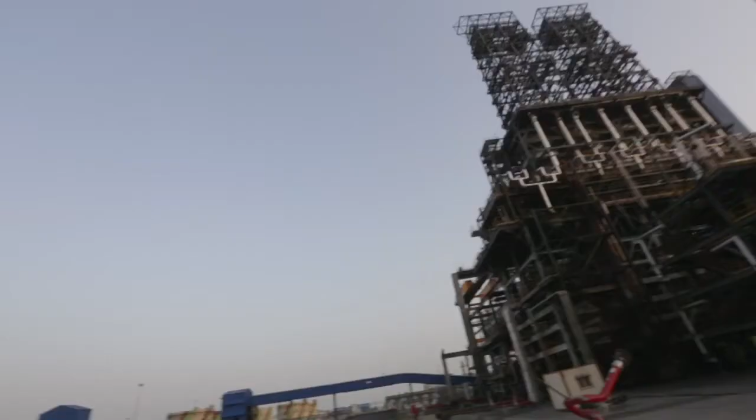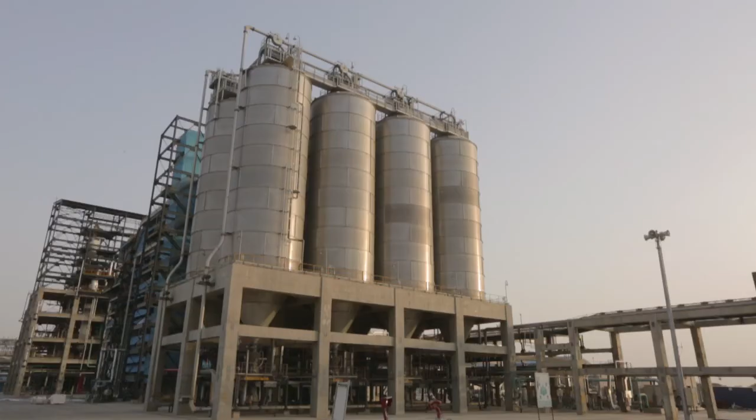Responding to this challenge, the Guru Gobind Singh Refinery was set up in a record time of 4 years, making it the fastest oil refinery to be built in India. Today, what stands in the middle of the agrarian heartland of Punjab is an industrial superstructure powering lives across the country.

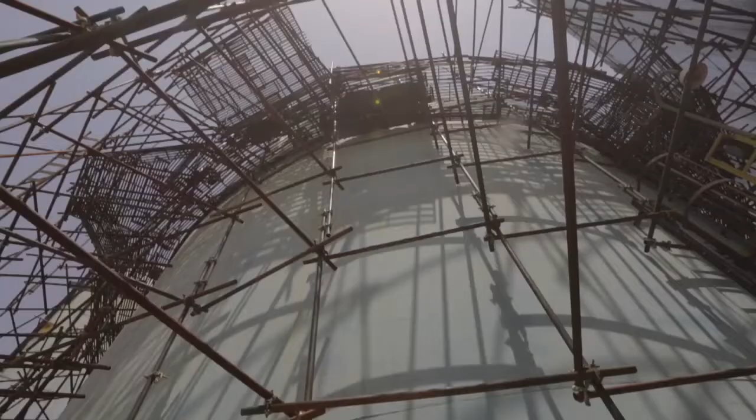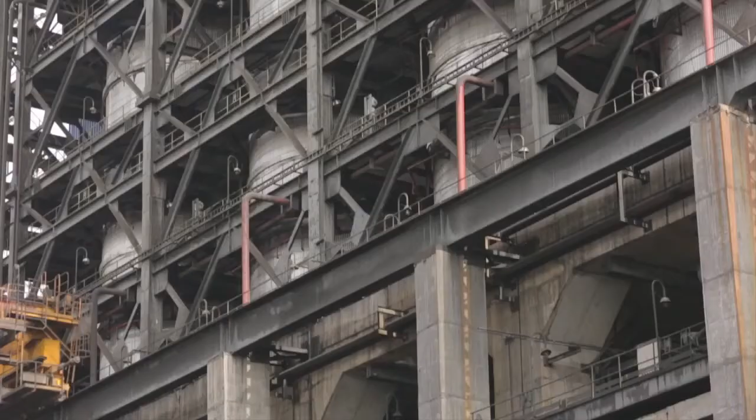Close to 50 degrees Celsius, almost 9 degrees lower than the highest temperature ever recorded on the planet, Bhatinda is reeling under a severe heat wave. This small town in the scorching North India barely shows any sign of activity. But inside the Guru Gobind Singh Refinery, work cannot stop. Humans and machines sweat it out 24/7.

At stake is the health of one of the fastest growing economies in the world. This refinery is feeding the consumer of this country. There is a deficit of petroleum products like petrol, diesel, LPG, kerosene in this part of the country. So this refinery is catering to the needs of the consumer directly as well as the industries, so as to give employment and industrialization in this region.

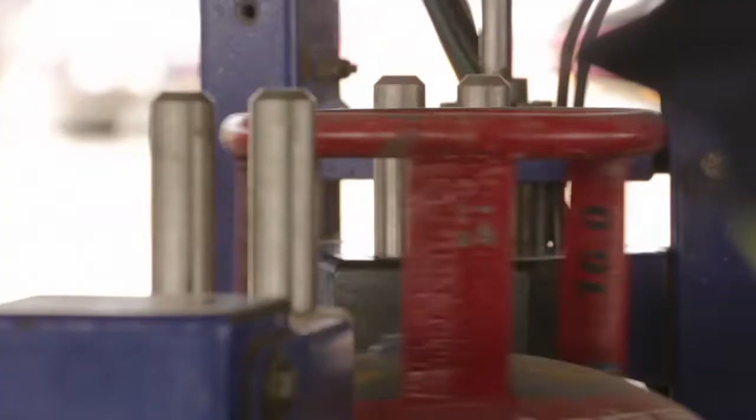When you step into your kitchen at home, right away you see the stove. The LPG that you use to cook, that's one of the products that we make at this refinery. Anything that you have in your kitchen, from the refrigerator to the food in it, was transported to your home by trucks that use petrol and diesel. Almost everything in your kitchen has somehow been influenced or made of petroleum.

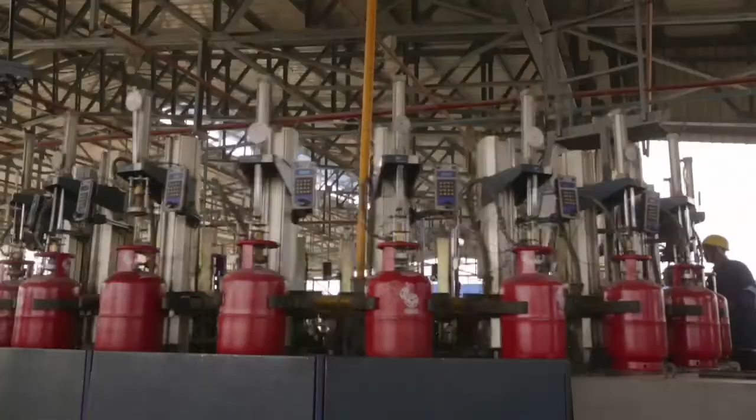The LPG bottled in these cylinders will fuel millions of kitchens across the country. Yours could be one of them. The next flight you take may be running on aviation fuel refined here within these enormous reactors. And the diesel and petrol stored in these tankers will soon be running through the engines of your cars, making your life smooth and fast.

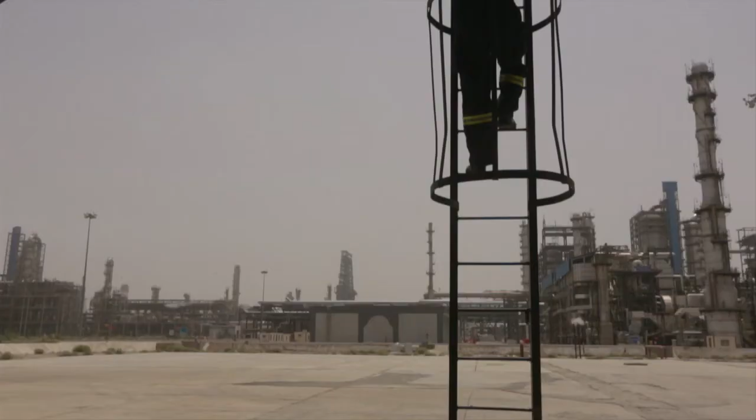It is now noon. In the next 12 hours, 90,000 barrels of oil will be processed at this mega refinery. The daily target is to refine 180,000 barrels of crude, enough to fill 12 Olympic-sized swimming pools.

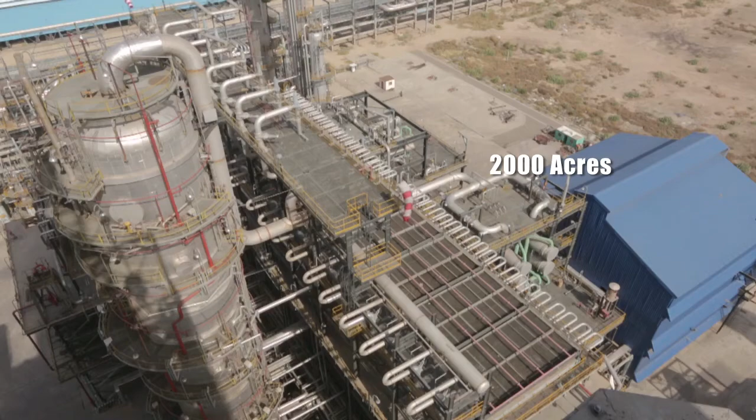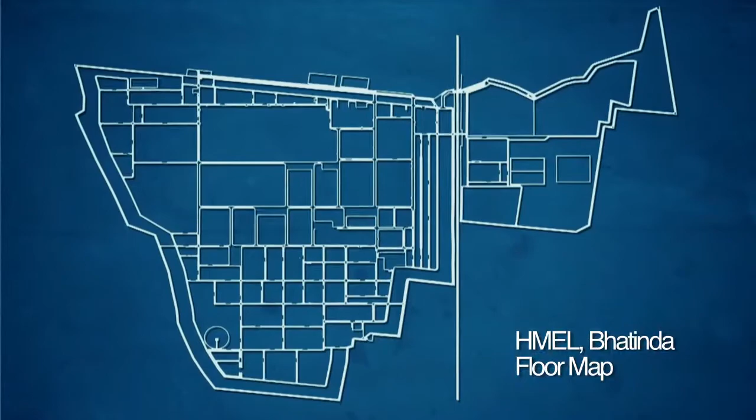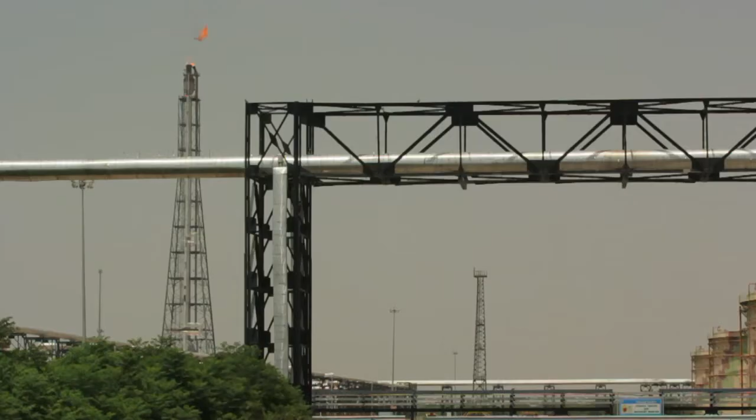What occupies these 2,000 acres, the size of over 1,100 football fields, is a formidable giant of concrete and steel. This mega enterprise has gobbled over 1,15,000 metric tons of structural steel, the weight of around 15 Eiffel Towers. This ceaselessly active flare beams at a tower standing at 140 meters tall, almost twice the height of Qutub Minar.

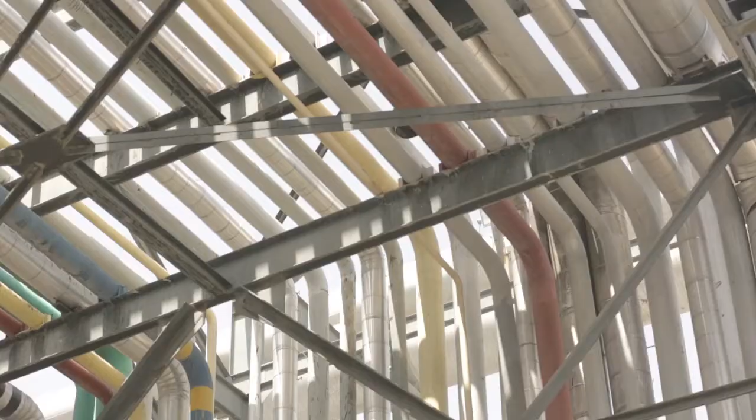And it does not stop at that. The maze of pipes crisscrossing this superstructure can cover a staggering distance of over 3,200 kilometers, approximately the length from the northern to the southern tip of the country.

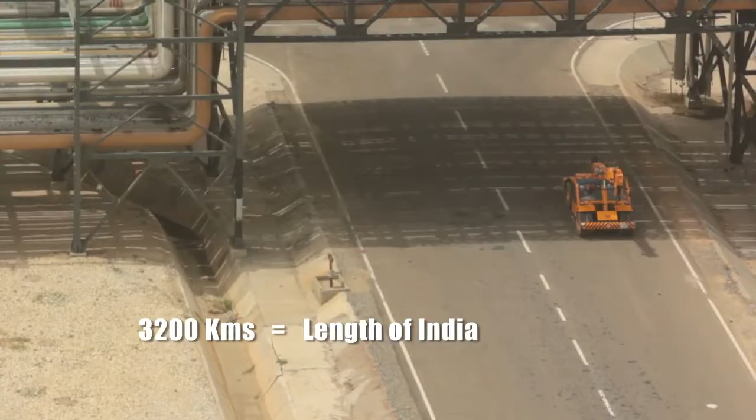Now this steel structure may stand to dominate the landscape and skyline, but to build this giant steel and concrete structure was a momentous task.

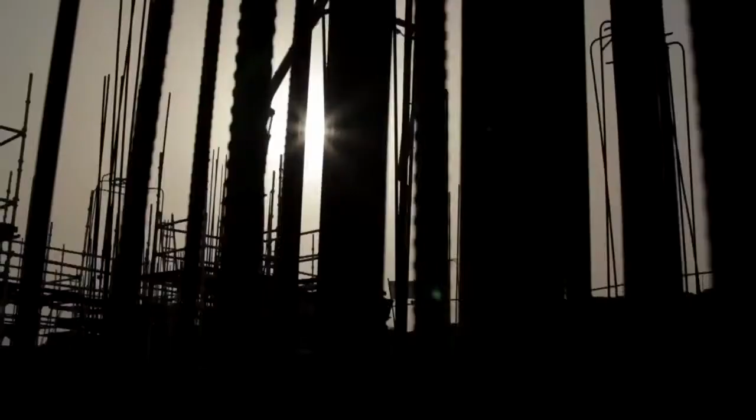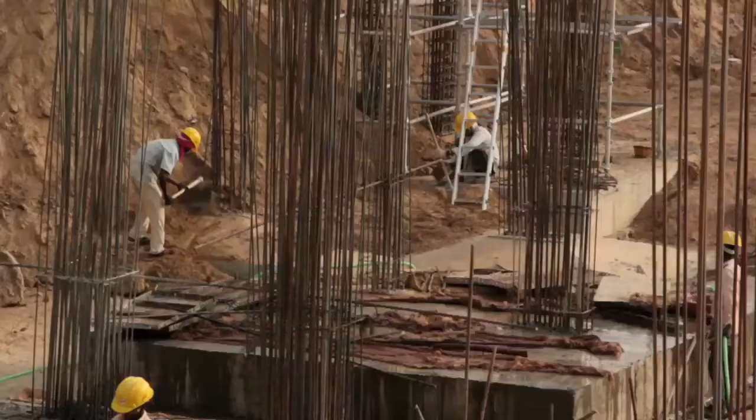Year 2007, Hindustan Petroleum Corporation Limited (HPCL) and Mittal Energy Investment join hands to form HPCL-Mittal Energy Limited and start work under the HMEL banner. Their purpose is daring: turn a barren piece of land into a mega refinery.

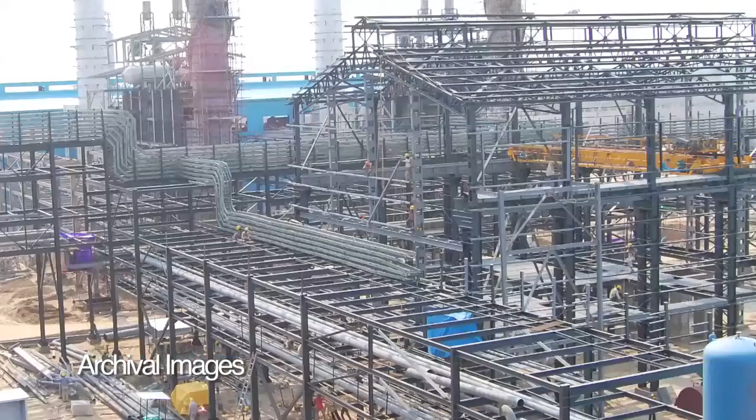Normally, a refinery takes anything upwards of 5 years for completion. But HMEL aims to get this superstructure ready within 4. If achieved, it will be the fastest in India.

But the challenges are daunting. Both infrastructure and organization have to be built from scratch. And to achieve it in 4 years, conventional practices have to be done away with.

Engineers select the concurrent approach over the commonly used serial approach for construction. In a concurrent approach, you would decide on the items to be bought first, you would do the engineering in parallel, and when you are doing the execution, you would mate the two so that the final product is what is required, or the final project is what you require. So that's what a concurrent approach is.

Building a refinery is not as simple as making a house. Highly combustible liquids and gases will run through this complex web of pipes and reactors. Even the slightest negligence can result in a catastrophe.

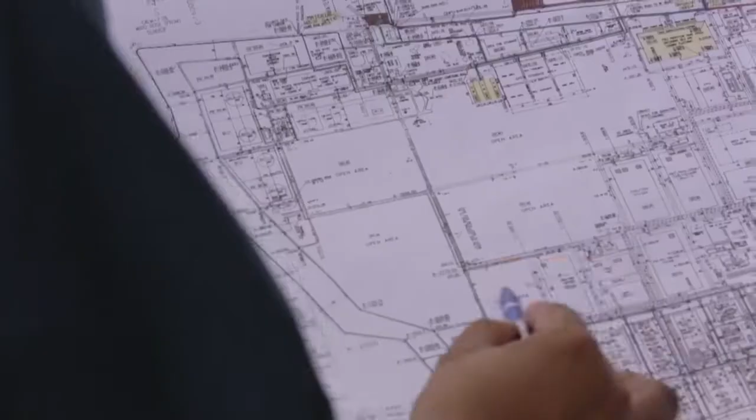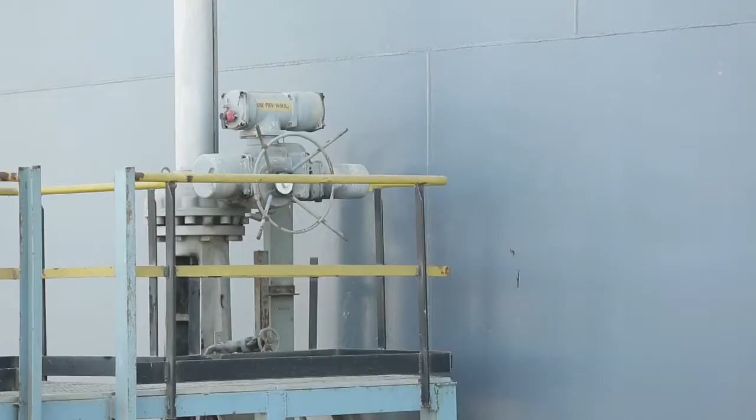Attention has to be paid to the minutest details while setting up this colossal structure. All pipes and vessels were insulated to maintain stable and desired temperatures. And all high pressure systems and joints were tested for torquing and tensioning to ensure against leakage.

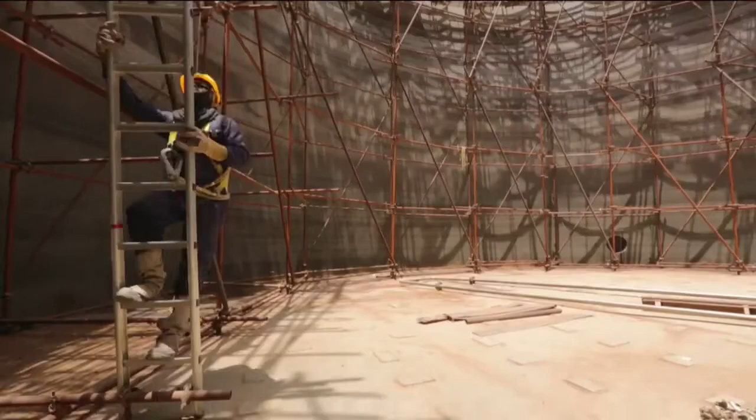For building a refinery of this size and magnitude in a short period of 4 years, as it was planned and executed, the major task was to muster the resources. At extreme conditions, we had almost 35,000 employees and workmen working at a time during its peak. Creating that kind of workforce working 24 hours a day, if that was not done, we would not have achieved the targets we had planned for.

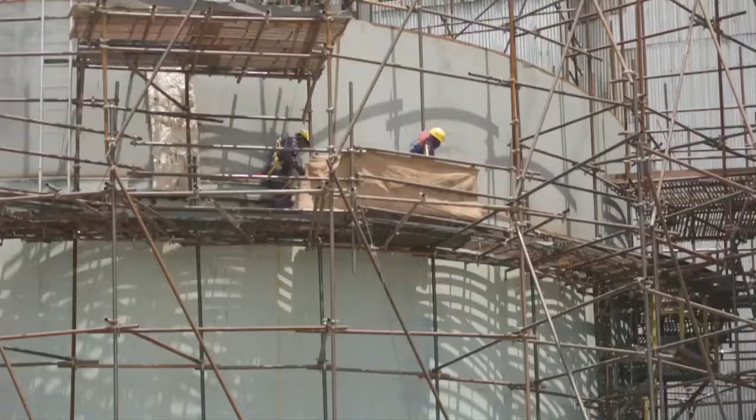But dealing with labor and weather is one of the many challenges that come while building a structure of this scale and magnitude.

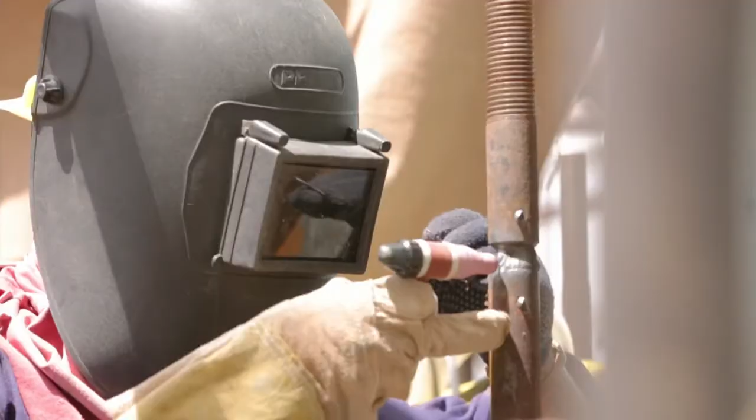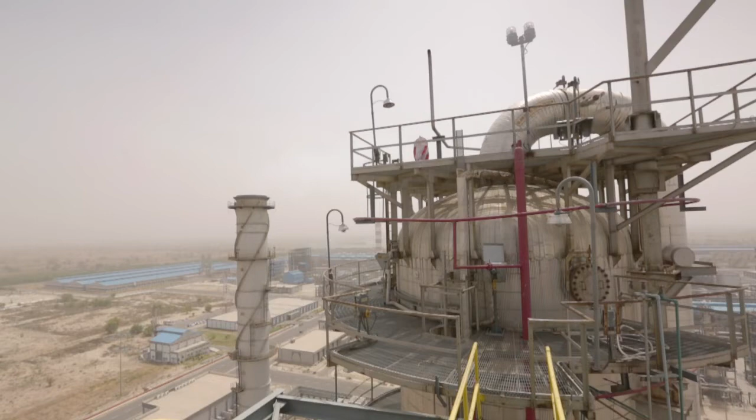To save precious time, an on-site pressure vessel and reactor fabrication shop was created to forge these reactors. But 3 of these giant reactors required specialized forging plants located over 1,000 kilometers away from the installation site. Transporting them all the way to Bhatinda was a Herculean task.

The Indian road infrastructure is not capable of handling such heavy loads. The flyovers, the bridges - if the reactor moves over it, it will break down. So for crossing every flyover or bridge, one has to make a bypass. In the long journey of 1500 kilometers, we had to construct about 60 bypasses.

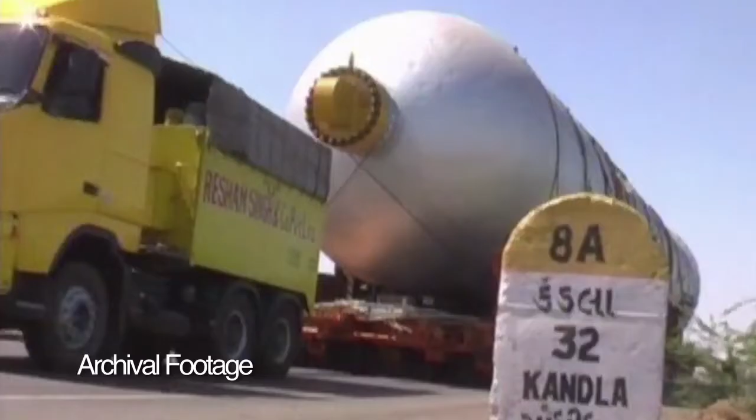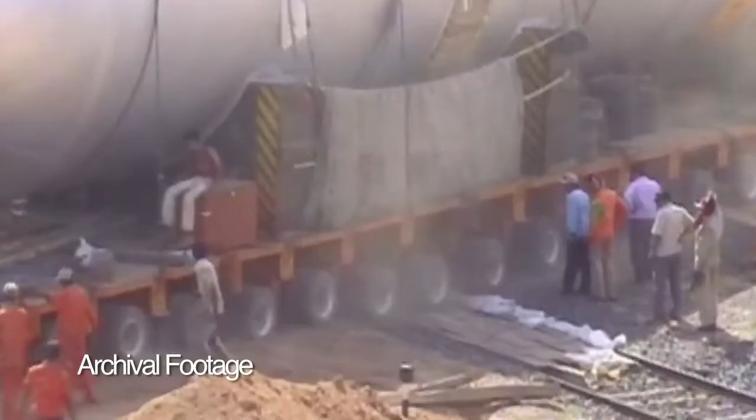So every single thing had to be planned. We had to remove the divider of the road, reconstruct it. Similarly, we had to broaden the road at the turns, make a larger radius to take a longer turn. The electric wires had to be removed, electric poles had to be removed, shutdown had to be taken from authorities.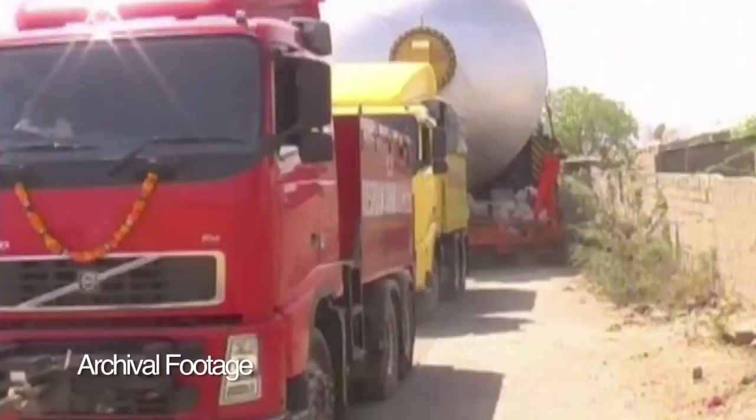This part of northern India has rains in July, and if the rain takes place, all these bypasses will get washed out, the rivers will get flooded, canals will also get flooded. The whole movement will get stranded for about 3 months. It was so critical - the whole project schedule would go haywire.

Sometimes the balconies of houses that were on the way had to be removed, and compensation had to be given. So many small activities had to be coordinated to see that the movement takes place seamlessly. Unless all these things are done concurrently, the movement cannot take place.

On July 1st, 2010, after 119 days on the road, the reactors reached Bathinda, 1 day ahead of the scheduled time.

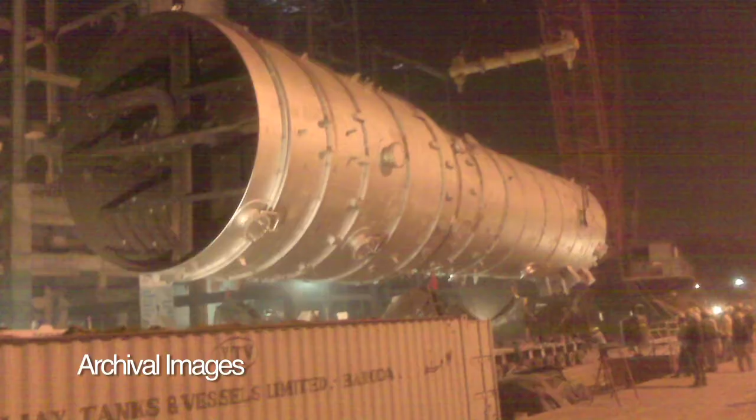In the middle of lush green fields of Bathinda stands this superstructure, powering the lives of millions of Indians across the northern part of the country.

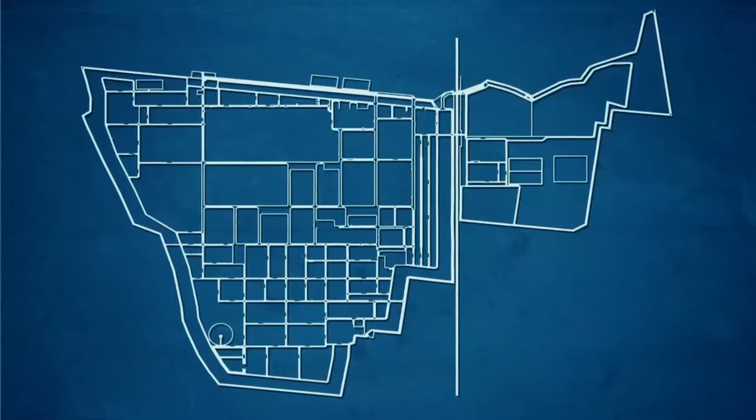As early as 1996, Bathinda was selected as the site for the construction of this mega refinery to meet the energy shortfall in North India.

But there was one major disadvantage. India majorly depends on imports for crude oil. Huge ships carrying crude from different parts of the world dock at Indian ports. From here, crude oil is transported to refineries, mostly located nearby. But the refinery in Bathinda is a long haul from these coasts.

It required nothing short of genius to design a pipeline that will quench the thirst of this mega refinery day in and day out.

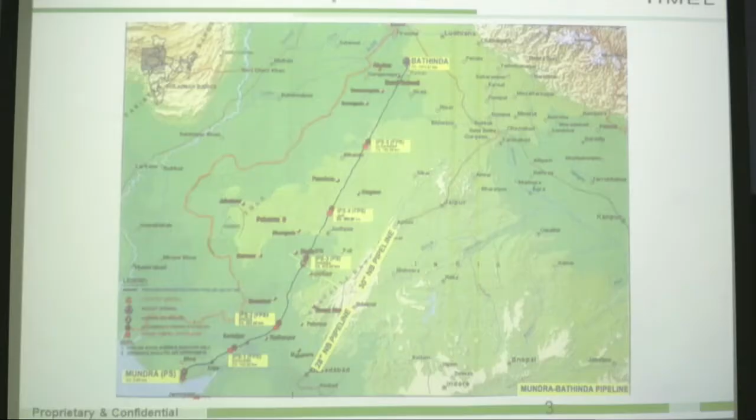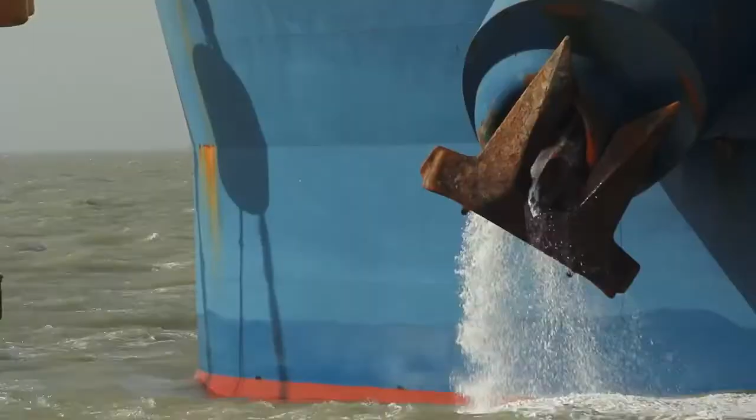To collect crude oil from super tankers, a single point mooring system, or SPM, was installed 10 kilometers offshore Mundra, giving very large crude carriers adequate depth to drop anchor and discharge crude oil to the SPM, which in turn diverts the oil into an underwater pipeline located 32 meters below sea level.

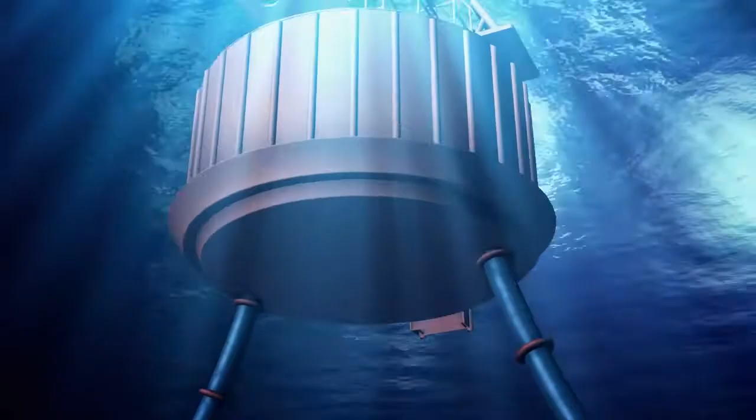Two Chinese lantern-shaped pipes carry the crude oil from the SPM to the underwater pipeline. Their additional length allows the SPM to stay on the water even during high tides.

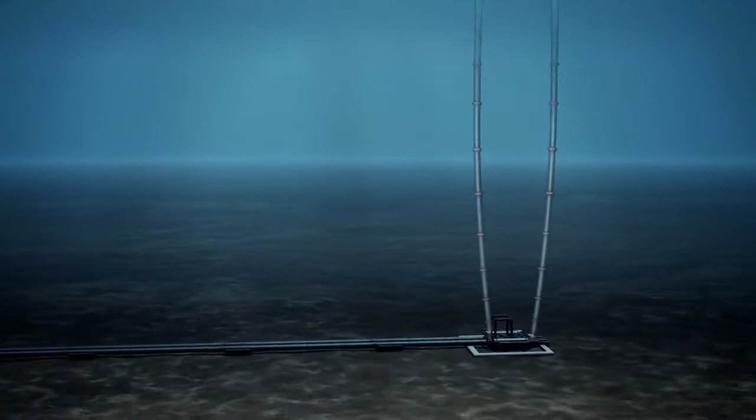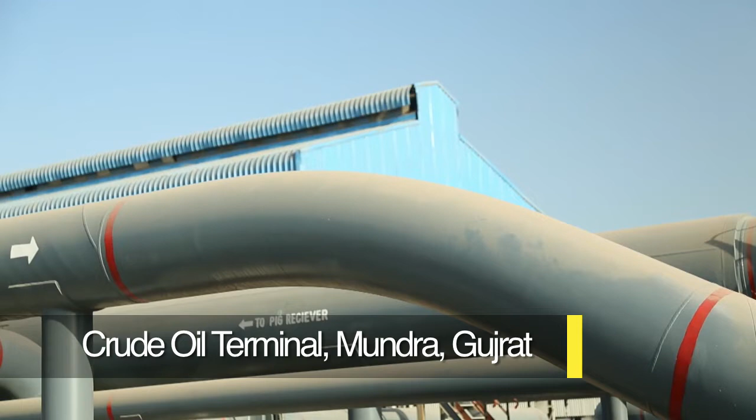After traveling through the underwater pipeline for 10 kilometers, the crude oil hits the shore. From the coast, the pipeline stretches another 7 kilometers to reach the crude oil terminal. Different types of crude from around the world are collected and stored at the crude oil terminal before being systematically discharged to reach the refinery at Bathinda.

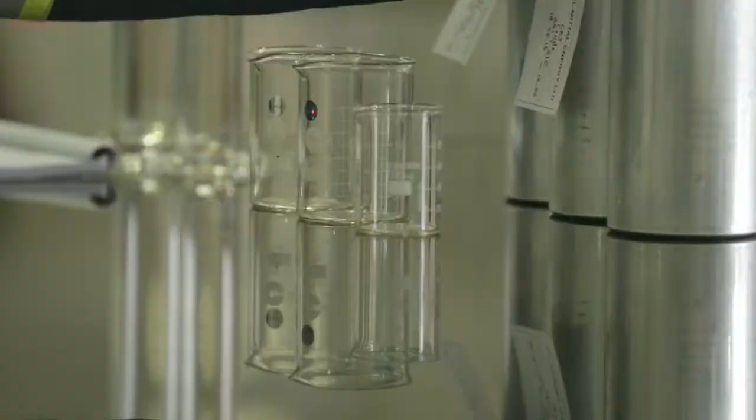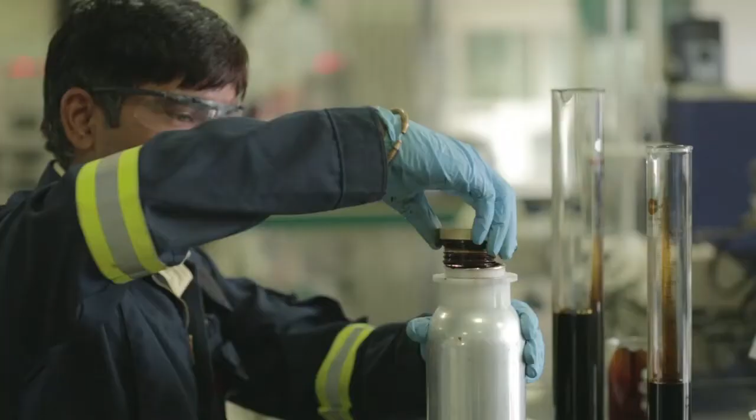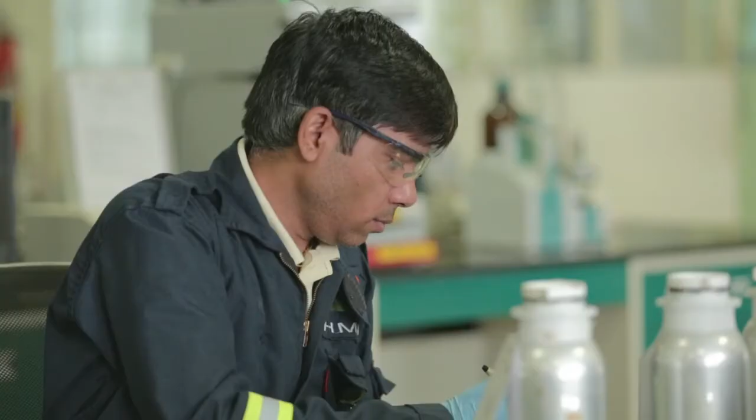Besides storage, blending is done at the crude oil terminal. Very heavy crude oil is blended with lighter crude oil. This very heavy crude oil corrodes the insides of the pipeline due to high sulfur content and has to be blended with crude oil that has low sulfur content. Once the blending is done, the crude is ready for a journey of over 1,000 kilometers to Bathinda.

Covering a staggering 1,017 kilometers, engineers built one of the longest underground pipelines in India. It runs across 4 different states to seamlessly supply oil to the refinery at Bathinda.

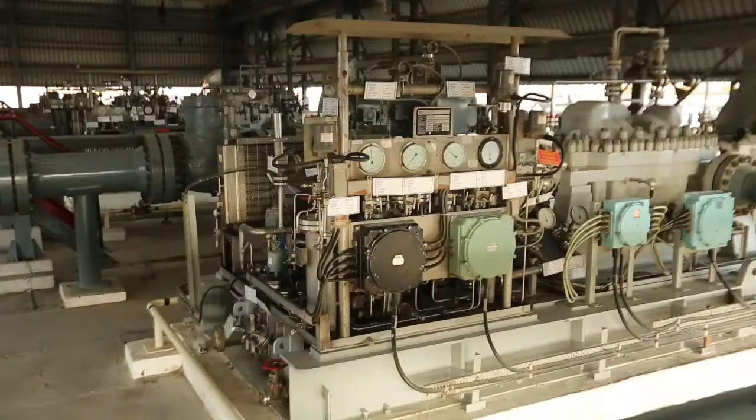Two heavy pumping stations located at Mundra in Gujarat and Dhansa in Rajasthan maintain the pressure and ensure a seamless flow of crude oil in the pipeline as it reaches Bathinda.

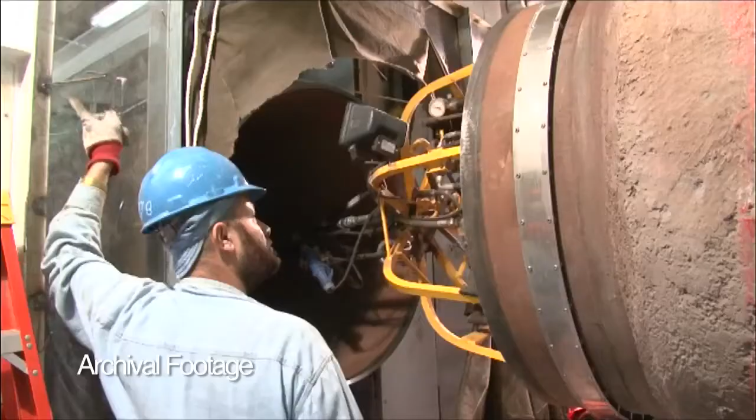But building the underground pipeline had its own set of challenges. To lay the cross-country pipeline is always difficult. We faced a few problems, like in marshy areas we faced problems due to limited space. And the second problem we faced was when we were doing major river crossings like Narmada and Sujlam Suflam.

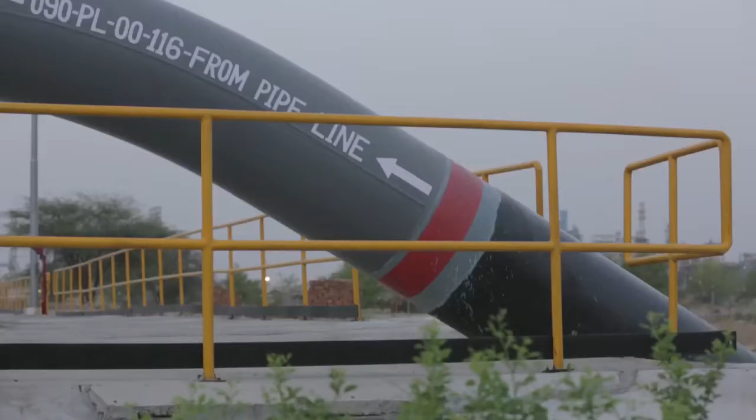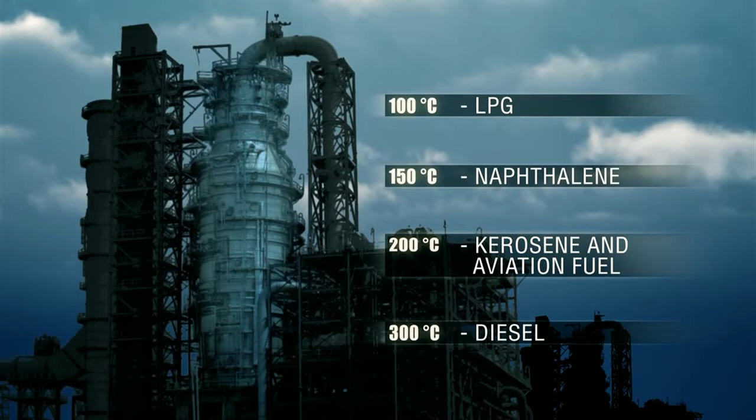Once the crude oil reaches Bathinda, it is ushered into the crude distillation unit at a minimum of 400 degrees Celsius, the first step of the refining process. Once the boiling point rises, different vapors escape at different temperatures, which are then chemically treated to make them available as finished products.

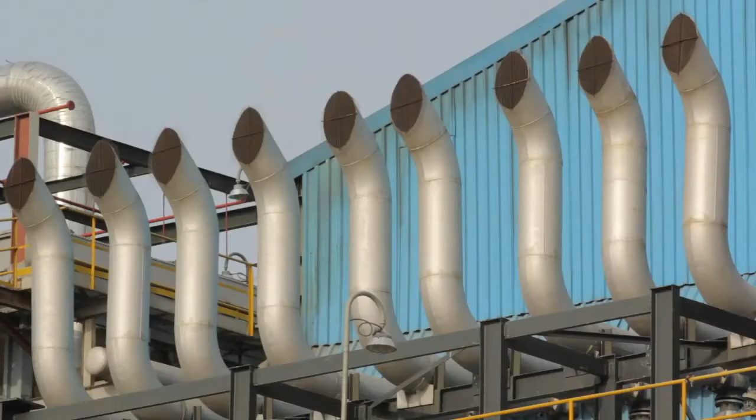The Fluidized Catalytic Cracking Unit (FCCU) is the heart of the oil refinery. And with good reason - it chemically breaks heavy hydrocarbons to produce various valuable products such as propylene.

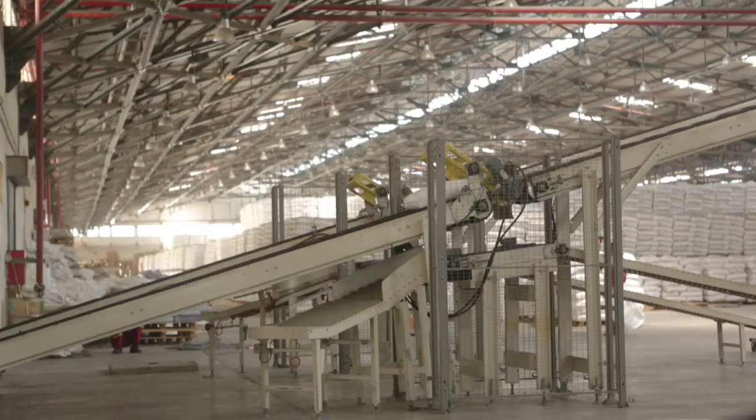This FCCU produces propylene. This propylene is converted into polypropylene through the polypropylene unit. And this polypropylene is used for making all the products around you, like credit cards, mobile phones, car dashboards, buckets, films. This polypropylene is used in all of this around you.

Day in and day out, workers and machines work seamlessly to ensure that this superstructure churns out products on which our world operates.

Forged in just over 4 years, this refinery fuels millions of lives across North India and ensures that the chariot of growth never halts.

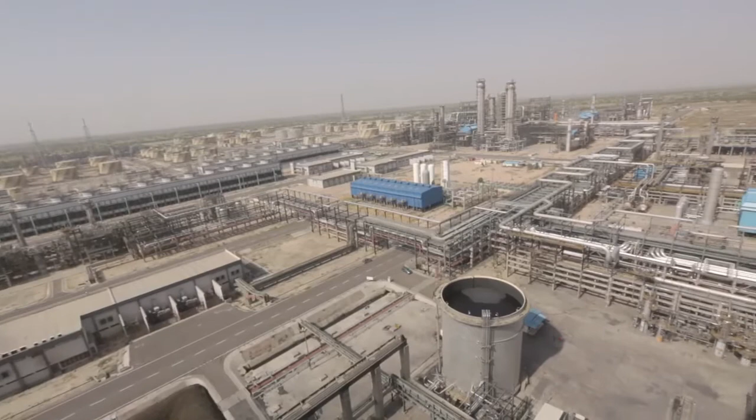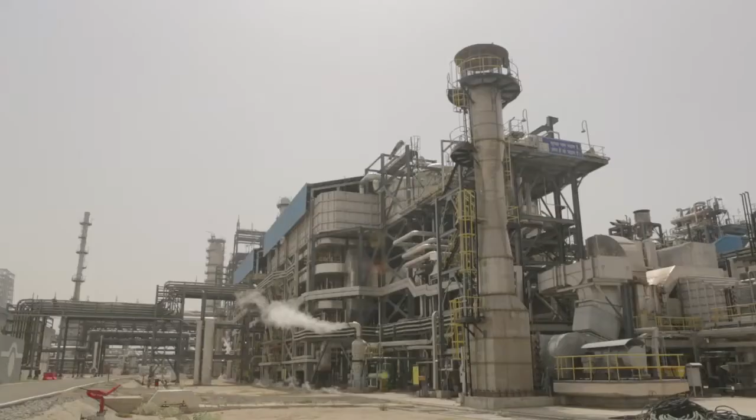While dealing with such volatile substances, one must always be prepared for the worst. The smallest spark or leakage, even undetected by the naked eye, can put lives at risk, besides leading to billions of dollars of investment burnt to ashes.

Gasoline at 400 degrees in vapor is a very dangerous sounding thing. Yet our guys and our equipment are designed and trained so that we can handle that type of material day in and day out safely. In the event that there is a problem, everybody has been trained in how to react to any type of emergency.

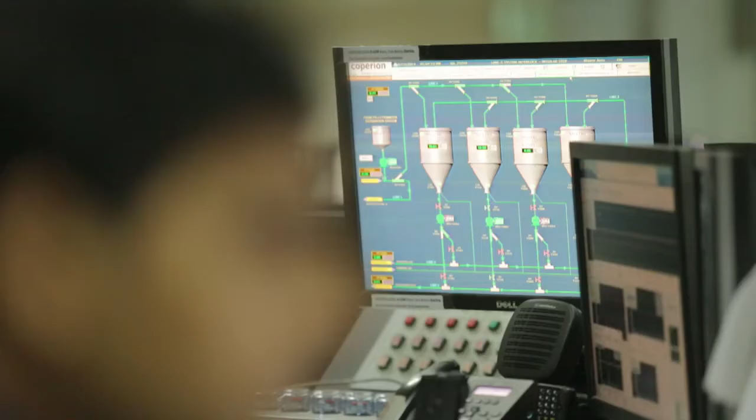An elaborate safety system ensures that there are no leaks or sparks, so engineers are always on the watch. Any dip in pressure in the pipeline reflects on the monitors. The potential site of leakage is immediately determined, and a quick response team is dispatched to fix the leak.

We operate a high-risk industry here. With that in mind, we have to have things in place to protect people and equipment. We have billions of dollars of equipment out there and priceless people's lives at risk. We have systems in place where we can react to every situation that occurs.

We have alarms that will come to the refinery, to the main fire station here. That will enable us to respond within 3 minutes to any location in the refinery. We can deal with any situation that may arise.

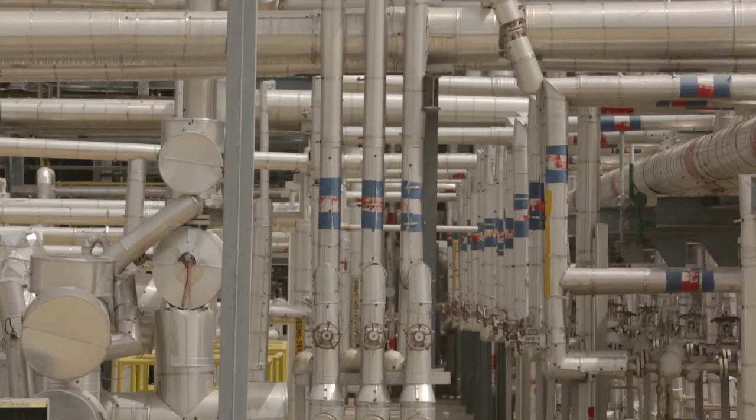What comes as a black viscous liquid in these pipes and reactors transforms into naphtha, jet fuel, kerosene and diesel, the materials on which our world operates.

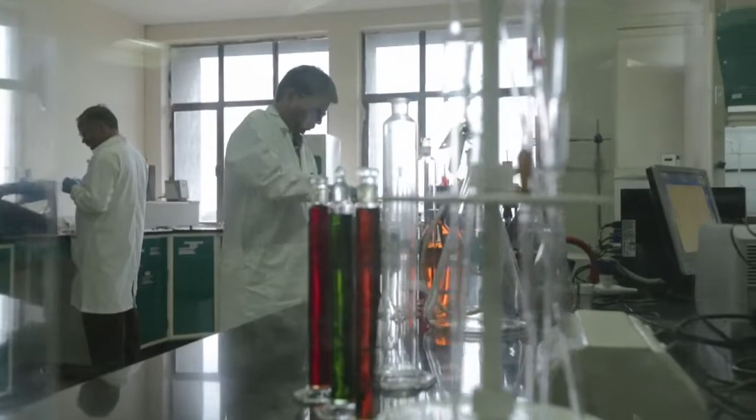Once a batch is refined, samples of various products are tested at the laboratory to ensure that their properties are intact and they are fit for the intended use.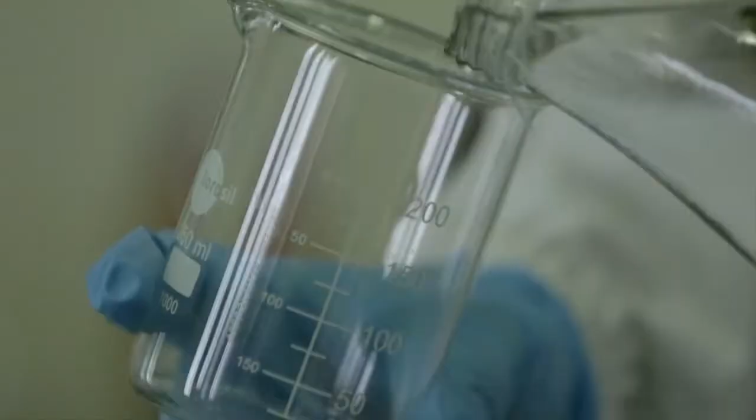It is the responsibility of the laboratory to make sure that any drop of fuel, if it is moving from the refinery, it must meet the specification. And we are making sure that the product is meeting the specification always at every stage of movement.

Besides refining crude oil, this superstructure even stores, packs and transports its products. These tanks contain diesel and petrol, and soon they will be systematically dispatched through road, rail and pipeline to fuel our lives.

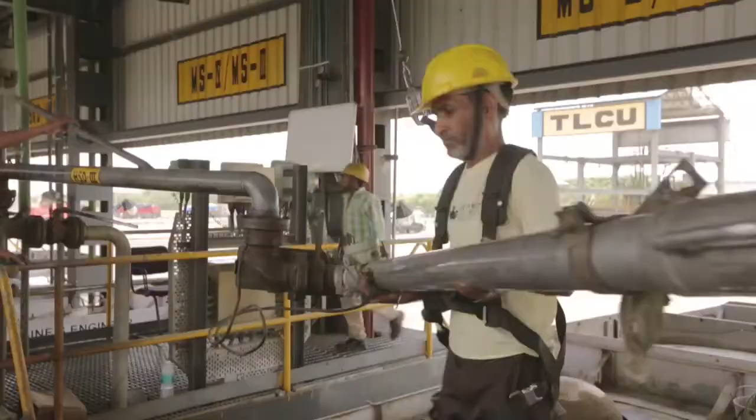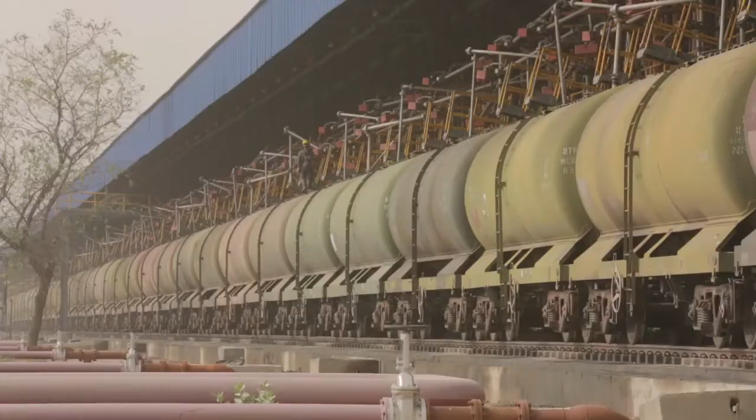A dedicated gauge of rail tracks run through the refinery so cargo trains can come and collect liquid and solid products for dissemination across the country.

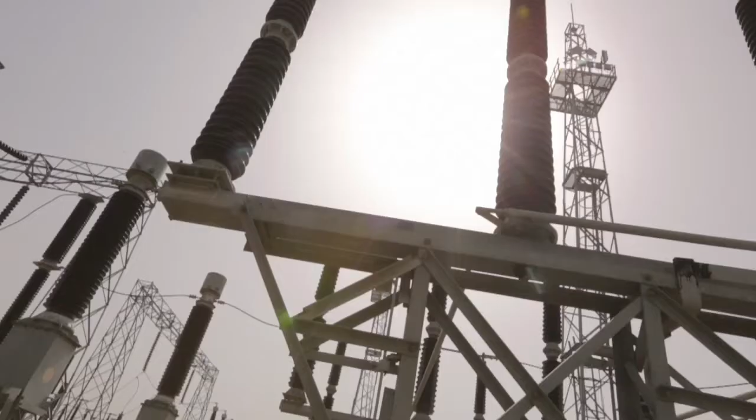But to keep this refinery running, a 165 megawatt captive power plant was designed to avoid dependence on external power sources.

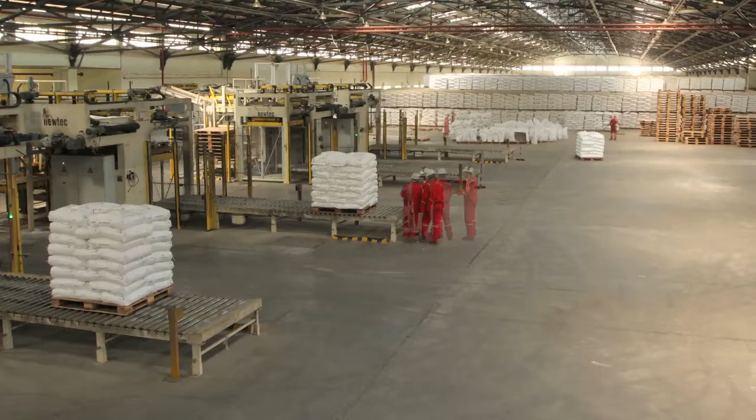From refining to packaging to transport, work at this mega refinery carries on seamlessly to meet the demands of over 150 million Indians.

As the sun sets, the refinery lights up like a metropolis, like a beam from a lighthouse shining across an empty horizon.

Built in just 4 years, the Guru Gobind Singh refinery is the fastest refinery to be constructed in India. When we started, there was no organization. We were just born in 2007 with 10 people.

Building the refinery was one of the smaller challenges. The bigger challenge was to build this organization. We have people from 7 countries, 120 organizations coming and helping us out. So I will say the crux of this was the team. The team was highly motivated, fully enthusiastic, very dedicated, knowledgeable.

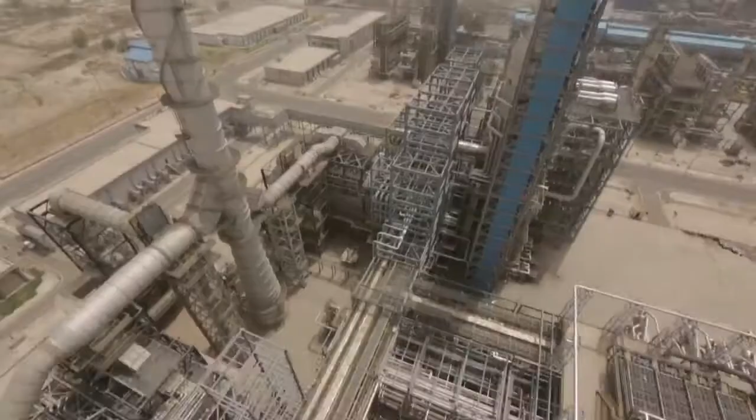And now, this superstructure is about to shift gears and further increase its production capacity to fuel the country's energy needs.